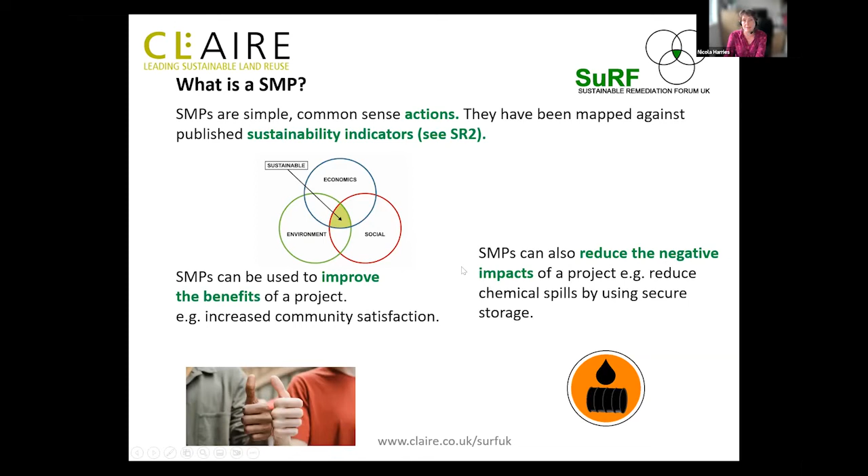So when I talked about SR1 and SR2, these are the indicators. The indicators are split in between environmental, social, and economic. It's the same number of indicators, 5 within each. So it means it's very balanced. And that's the whole principle of sustainability. It's a balance between environmental, social, and economic.

So environmental 1, it's got a title of air. So what we're talking about is potential benefits. When we're talking about the indicators, how to reduce emissions to air. So environmental 2 is the impacts on soil and ground conditions. And this is minimizing emissions to soil and improving soil functions. You'll see these are sort of just example benefits. I'm not going to go through all of them because I haven't got time, but it's really important to show that all of these indicators have got activities against each one of them. So I would actively encourage you to look at the SR2 report.

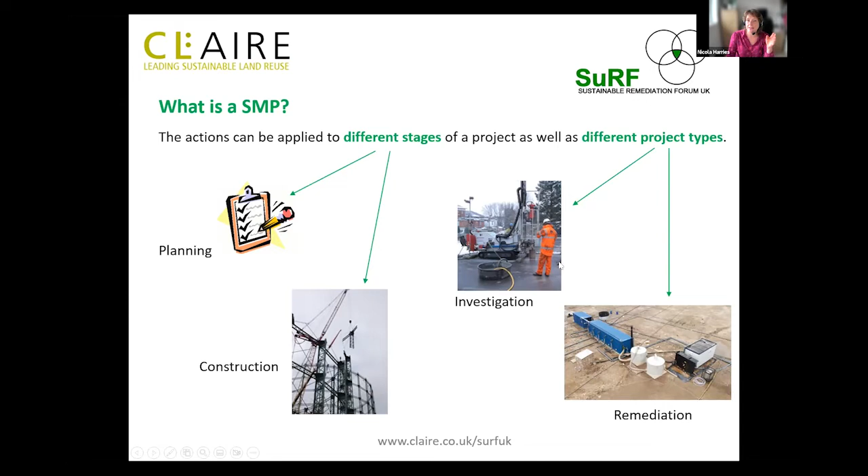So an SMP, it's an action that can be applied to different stages of a project, as well as a different project type. When we talk about different stages, as I mentioned, SuRF UK looks at things in a holistic way. So it's talking about when you're actually planning. So it could be at the planning stage, or it could actually be at the construction stage. Or when you're talking about different types of projects, you could be carrying out a site investigation, you could be carrying out a desk study, you could be carrying out a remediation. So SMPs have been mapped against different stages as well as different types of projects.

And this is just another example of how you can show how you're implementing SMPs across all the different activities of a construction project. And the really important thing about SMPs is you can have them at very high level. It could be at corporate level.

So for example, you may have a client who says, I am setting sustainability criteria for all my supply chain. And this could be carbon counting. It could be identifying economic benefits for the local community, different levels for corporate. So you could be mapping your sustainability practices against corporate level that have been set for you as a company, or you work for a corporate company and you are setting those for your supply chain.

Or you could do your sustainable management practices on a number of sites, a portfolio of sites, so you can map them against all your sites. Or it could be on an individual project. So what I'm just trying to say is sustainable management practices can be used at all sorts of different levels, whether they're individual projects or whether they are corporate company level.

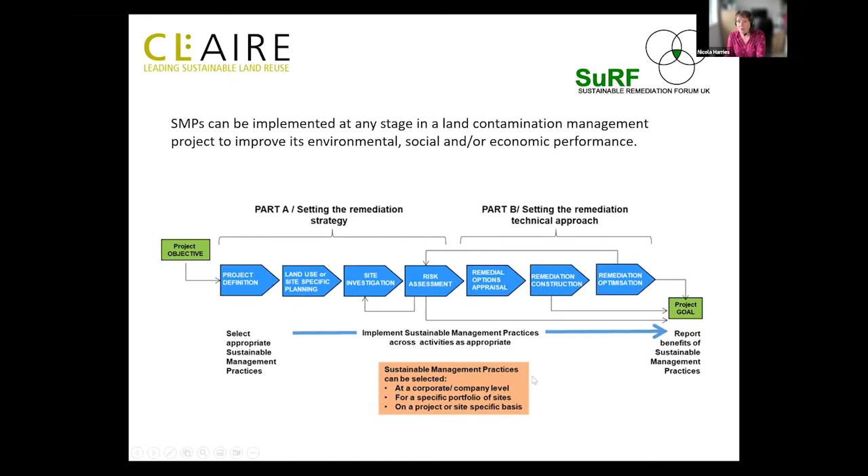So the heavens have absolutely opened here. I'm having to raise my voice because it's teeming.

Just to give you some examples, just to put it into context. So a sustainable management practice might be minimizing vehicle miles. Now you think, oh, that's really sensible because that cuts down carbon, but it's actually mapping these against the indicators. So the impact, environmental 1, is air. So that means you're reducing the impact on air. Environmental 5 is natural resources and waste. So you're reducing the use of natural resources.

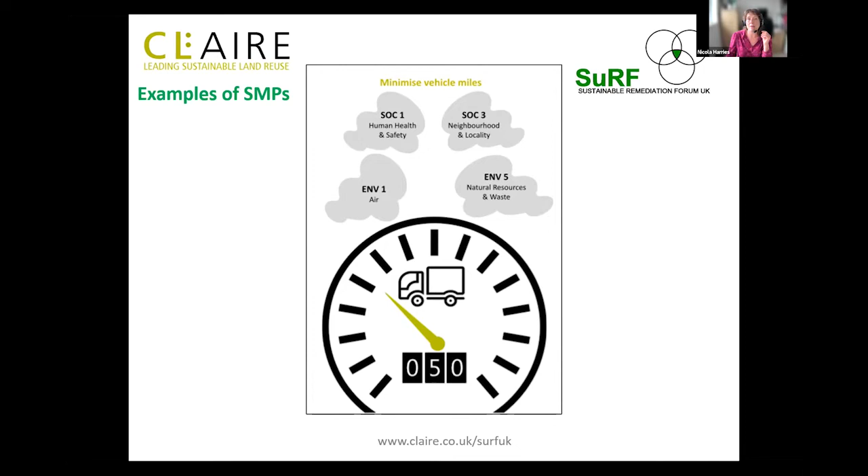Again, social 1 is about human health and safety. So the less miles you do, the less chance of accidents for your local community or for your staff, and the impact on the social for your neighborhood as well. So what we're trying to say is each simple process or practice you can map against your sustainability criteria. Give you some other quick examples.

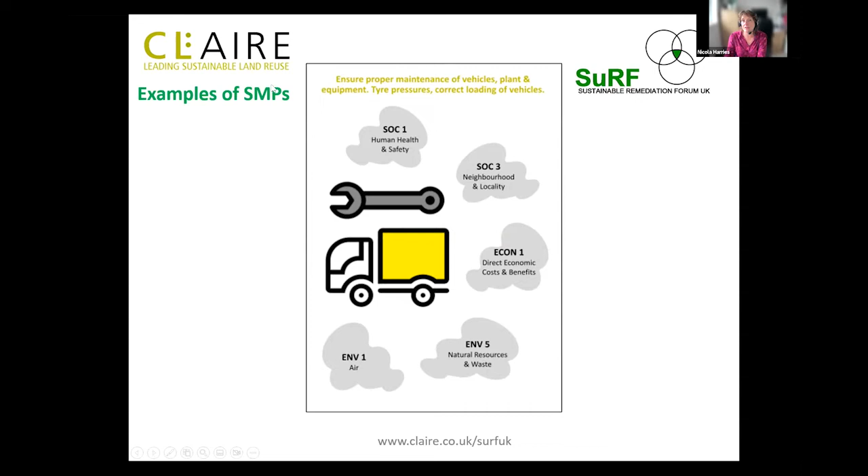A sustainable management practice titled ensure proper maintenance of vehicles, plant and equipment, i.e. you maintain your tire pressures, correct loading of vehicles. This means you can map it against environmental 1, environmental 5. You're not quantifying things, you're just identifying the different sustainability criteria that would improve if you carried out this action and you mapped it against that action.

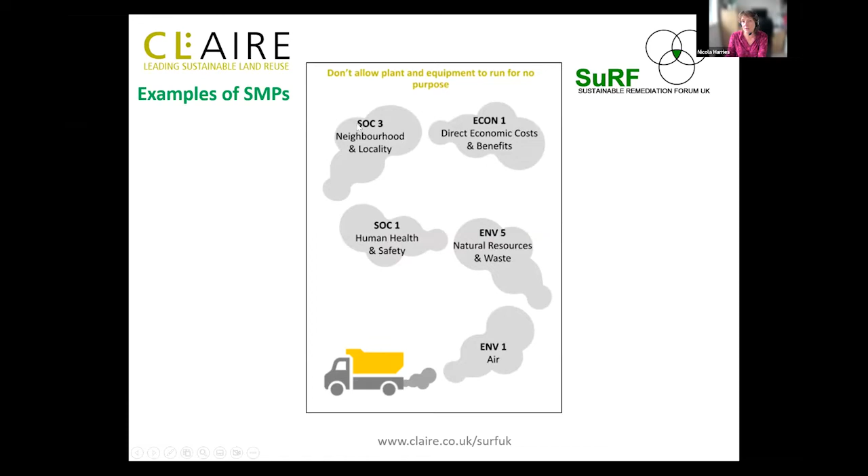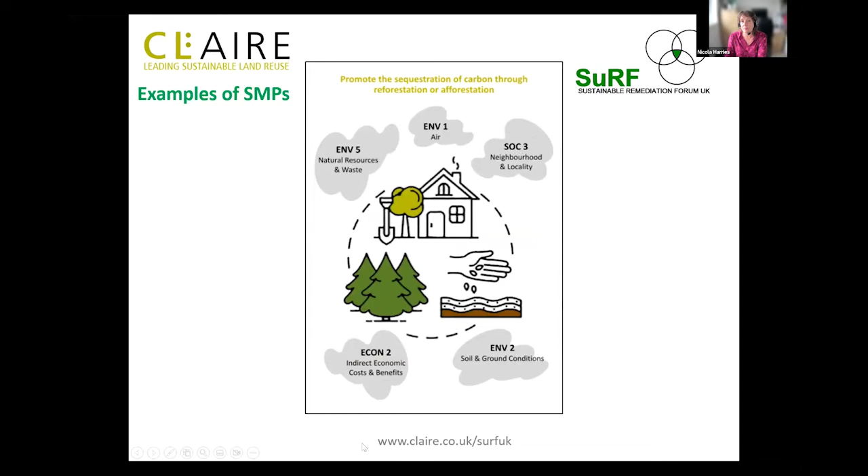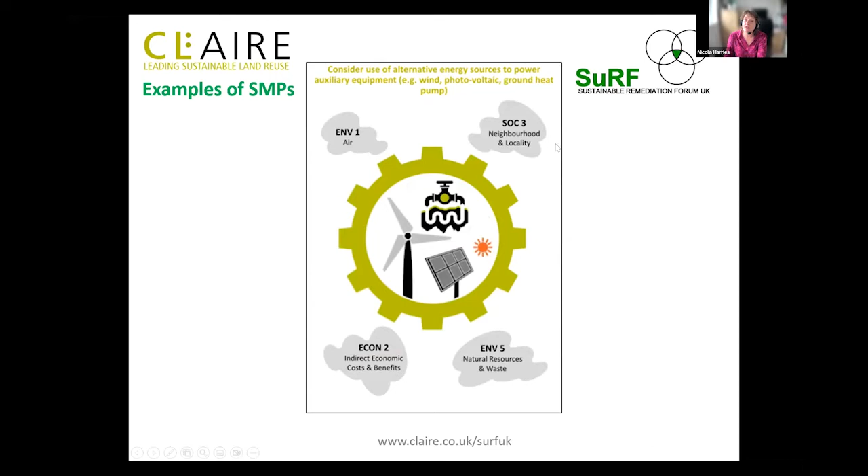Again, you make it a company policy to not allow plant and equipment to run for no purpose. Again, it has benefits on environmental 1, 5, social 1, social 3, economic 1. Again, if your project requires reforestation, this would then have these benefits against the different indicators. Again, if you used alternative energy sources, photovoltaic systems if you were doing a remediation project, or looked at ground source heat pumps, or used a wind turbine for a long-term remediation project. So these are the indicators you could benefit from.

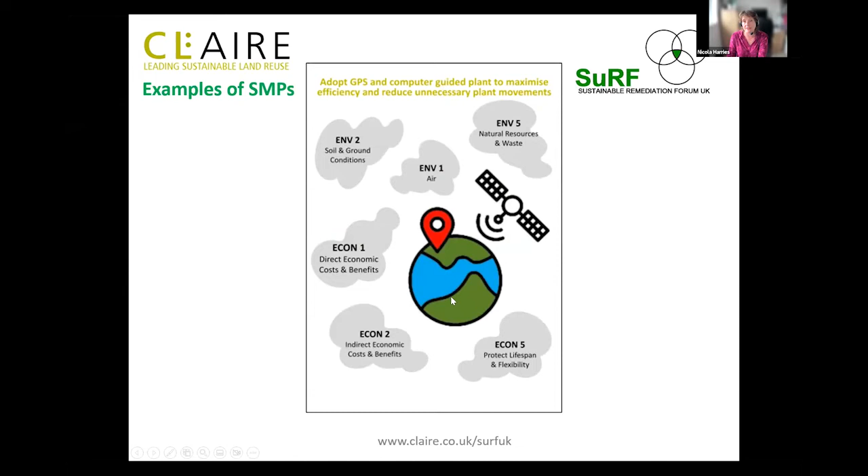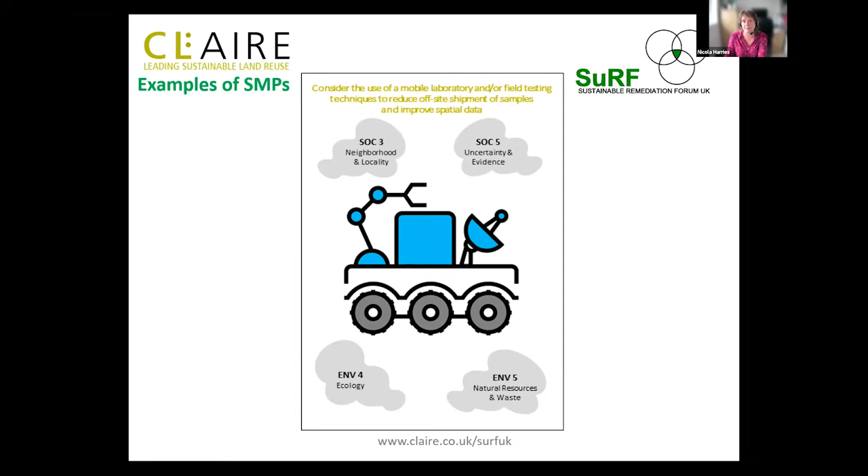Again, if you use GPS equipment on your site, that would cut down the amount of material you had to cut and fill, for example, if you were on a big construction site. These are the different indicators that we've mapped against that activity. Again, if you used a mobile laboratory or field testing techniques, so you reduced taking samples off-site into a laboratory, that would improve these indicators. So they are simple processes that you would do, but you're actually mapping them against sustainable management practices.

What we've done is we've actually mapped them against LCRM, the land contamination risk management process. So we've got the stages of procurement and land use planning. And then under the LCRM, we've identified processes under risk assessment, options appraisal, remediation and verification. And so this helps you again. It cuts out the thought process for you. You can actually search the spreadsheet. So just going through the process very quickly.

Initially, you identify your activity. What are you actually going to be planning to do or carry out on a site or as part of your project? These are the different stages we've identified. Then you would look to identify your sustainability objectives. What are the objectives that are associated with the project? So depending on the activity, you would then develop a short list of what would be important to the project.

As I mentioned, you may have a client that is setting targets for CO2 emissions or reducing the use of natural resources or waste minimization. Some clients have health and safety criteria that you must meet. The sustainability objectives must be associated with regulatory compliance, and you can address your stakeholder concerns as well. So it's identifying those key objectives.

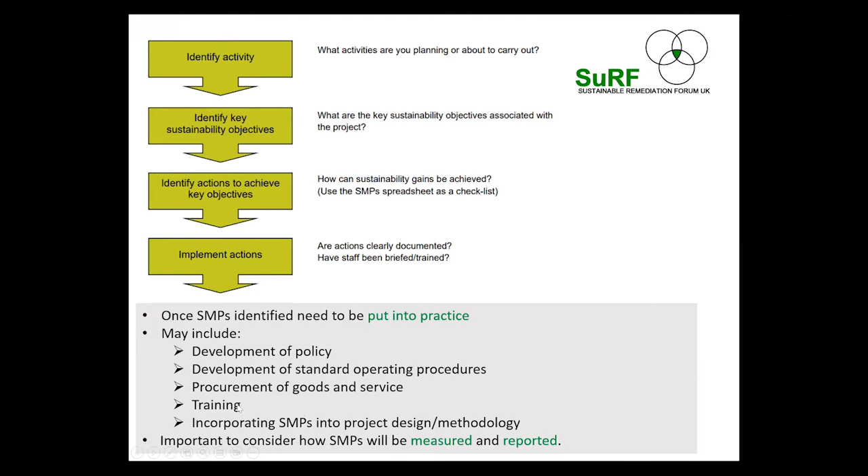So you may be developing an internal policy. You may develop some standard operating procedures to adapt your activity just so you start recording things. You could be changing your procurement process to start recording things. If you're a client, again, you may identify your goods and services from consultants and contractors, and you want to actually start building that in. Again, your subcontractors. You then develop some internal training, and then you start incorporating your SMPs into your project design and methodology, and you start recording these and measuring them and reporting them.

Once you have done all of that, then you can carry out a post-project performance review and see whether things worked or didn't, or how you could adapt your processes and procedures to get better processes and some better operating procedures at the end of it. And ultimately, you will probably identify that you actually made some cost savings, and you can see whether it's worth it or not. So that's the process. This is the process that you would go through using the spreadsheet that I will just quickly demonstrate.

So the spreadsheet is just a template, an Excel template for you to use. It allows you to identify, record and evaluate sustainable management practices, whether it's a project or a portfolio of projects. We've gone through and identified 182 SMPs for you to choose from. Now you can use some of them, you could use half of them, you could use 10 of them, whichever ones you think are applicable to your project, and you can add to them as well. It's an Excel spreadsheet, it's open, so you can change it, adapt it, refine it to whatever is suitable for you. And obviously it's free to download.

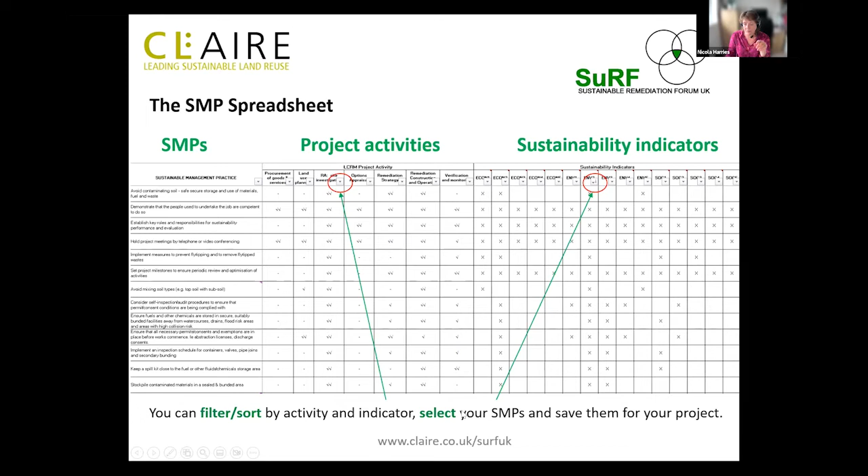And then at the end of the spreadsheet, you can also say why you've chosen those ones, you can make a comment of what's your justification, and then you can say whether you've implemented it, yes or no, and then you can carry out a performance review after your project. So, for example, avoid mixing soils and waste. What is the benefit of that? What's the justification? Did you do it? Yes. And what was the outcome? What was the evidence? And the point is you're actually evidencing your activities, and that's your sustainability gains.

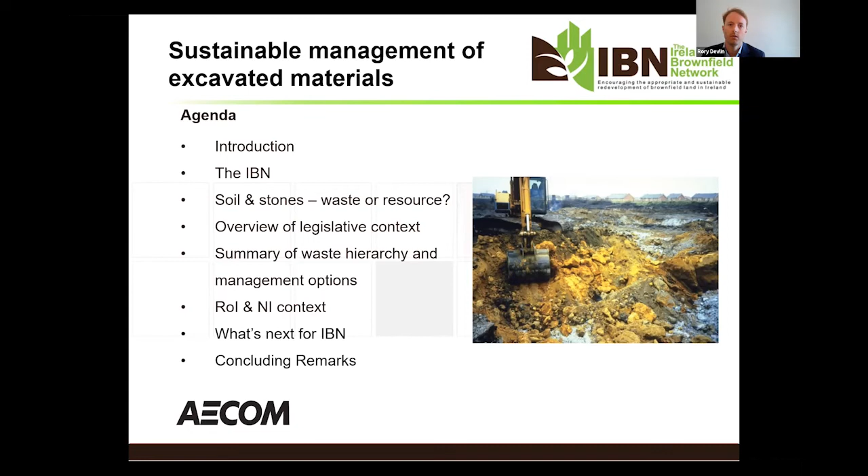So yeah, just an introduction to myself. As Ethny mentioned, I'm a principal environmental scientist with AECOM, and I've got 10 years experience of brownfield redevelopment and excavated soils management. And I've been doing a lot of waste classification work in this area. So hopefully I'll be able to impart some of my learnings over the last number of years to you today.

So the Ireland Brownfield Network was established in 2012 by a group of environmental professionals in Northern Ireland and the Republic of Ireland. So it's people from various backgrounds, including consulting firms, regulators, contractors, and academics. We have several technical subcommittees which cover different topics like ground gas, soil reuse and waste management, early careers, and emerging contaminants. We're now at over 500 members, and we have hosted technical conferences in Dublin, Belfast, and Cork over the years. As a group, we've consulted on several industry and policy documents, including draft guidance for Articles 27 and 28 and guidance on soil recovery sites in the Republic of Ireland.

And we've also drafted and issued guidance documents regarding the management of asbestos in soils and demonstrating competency in land contamination management. So our collective aim is to promote best practice in appropriate assessment and sustainable reuse of brownfield land, and to encourage constructive dialogue and interaction with everyone that's involved in redevelopment of brownfield land on the challenges and issues that we deal with across the island of Ireland. And that includes the topic for today's talk, management of soil from development sites. It's often a fairly hot topic in terms of the development industry. Many of the issues are common to both jurisdictions, but some are unique challenges faced by regulators, operators, and practitioners in each jurisdiction on the island, and they're dealt with in slightly different ways.

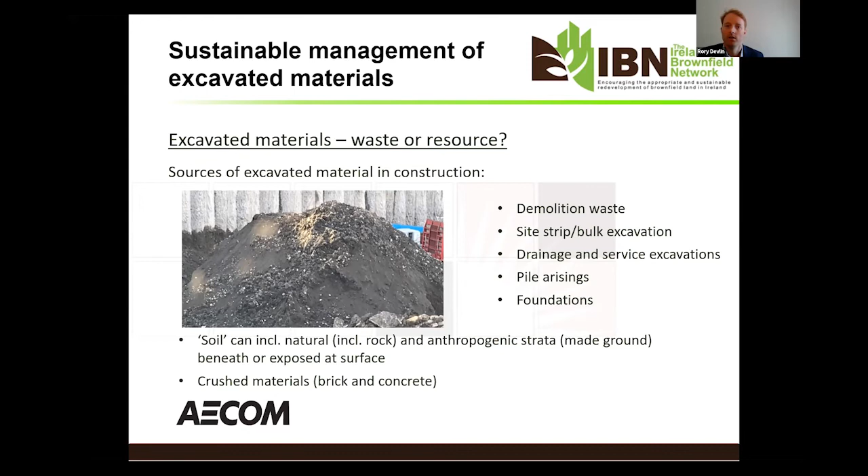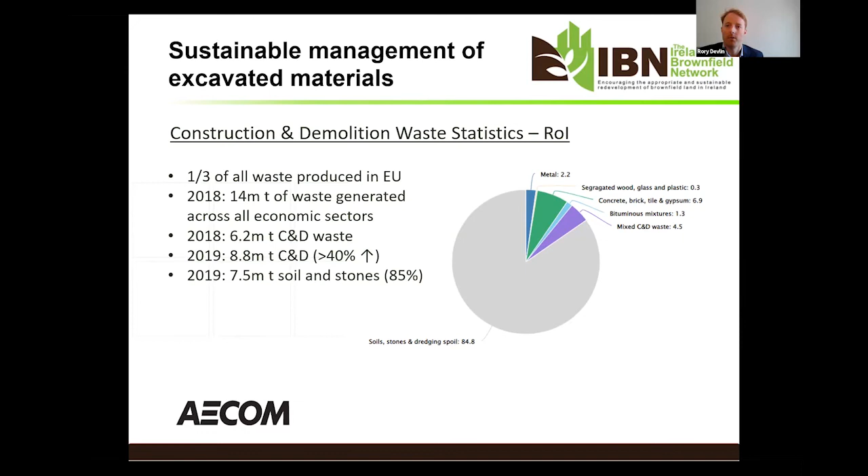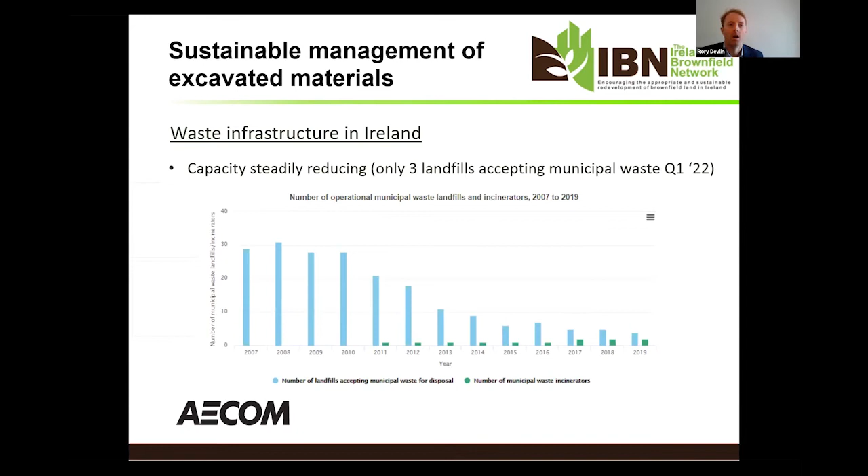To the point now where in the Republic of Ireland, there's only 3 landfills that are actually accepting municipal waste as of Q1 2022. So there's big pressure on waste infrastructure in terms of capacity. And that brings us back to the question of whether excavated material is a waste or a resource.

And for myriad reasons, it's imperative that we move towards a more sustainable or circular economy approach of preserving resources, whether that's primary aggregates being replaced with reused excavated materials, preventing precious landfill void space from being used up by diverting waste from landfill, prevention of carbon emissions from waste transportation, or any other ways that we can be more sustainable in managing excavated materials.

The governments in Ireland, in Northern Ireland and in Great Britain are all working to produce circular economy strategies and environment strategies that are more fit for purpose in terms of the new thought process. The Government of Ireland, for example, in their circular economy strategy for 22-23, noted that within the construction sector we need greater resource efficiency and resource reuse

to avoid the need for millions of tons of virgin raw materials to be produced, and also to reduce the carbon intensity of our built environment. As a byproduct of this, reducing the volume and associated costs of construction and demolition waste could also contribute greatly to affordability of development, for example, of new homes, given the current housing crisis.

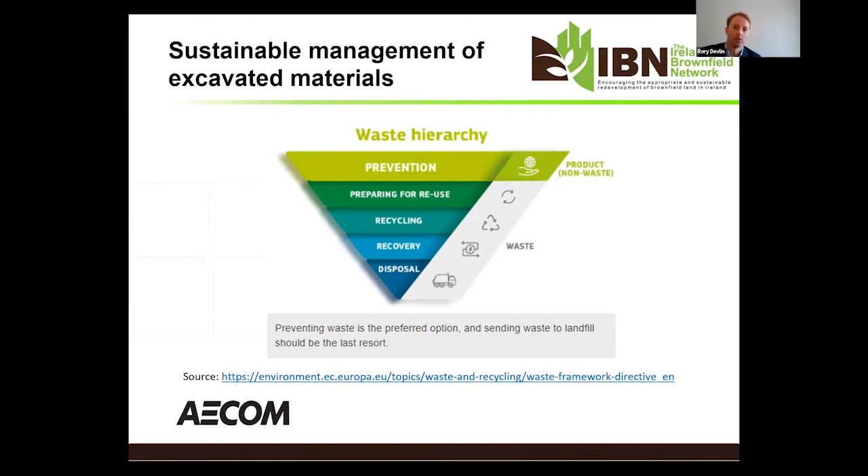And it includes a number of exclusions. The first one that's of interest to development sites is that land which remains in situ, including unexcavated contaminated soil, is excluded from the scope of the Waste Framework Directive, as are uncontaminated soils and other naturally occurring materials which are excavated in the course of construction activities and which are reused on the same site from which they are excavated.

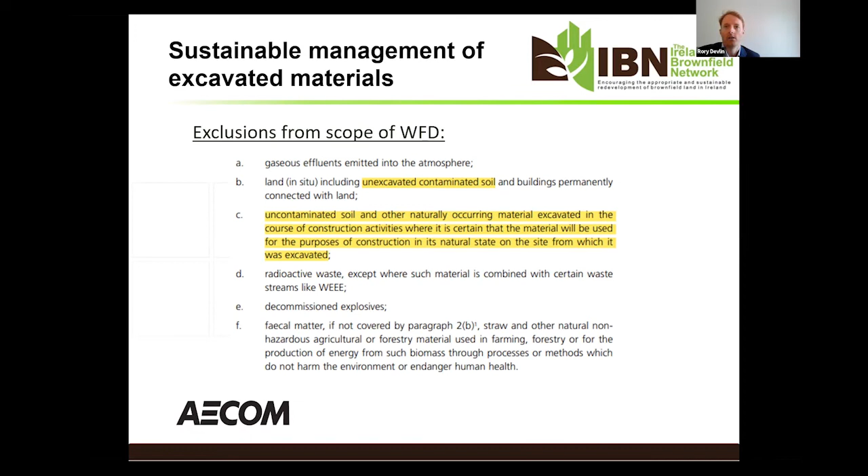There's a number of other items excluded from the Waste Framework Directive as well, such as wastewaters and animal byproducts. They're not of relevance here, but potentially of relevance are wastes resulting from prospecting, extraction, treatment, and storage of mineral resources in the working of quarries. In addition to those exclusions, the Directive also includes provisions for byproduct and end of waste. A byproduct is a substance or object resulting from a production process, the primary aim of which is not the production of that item.

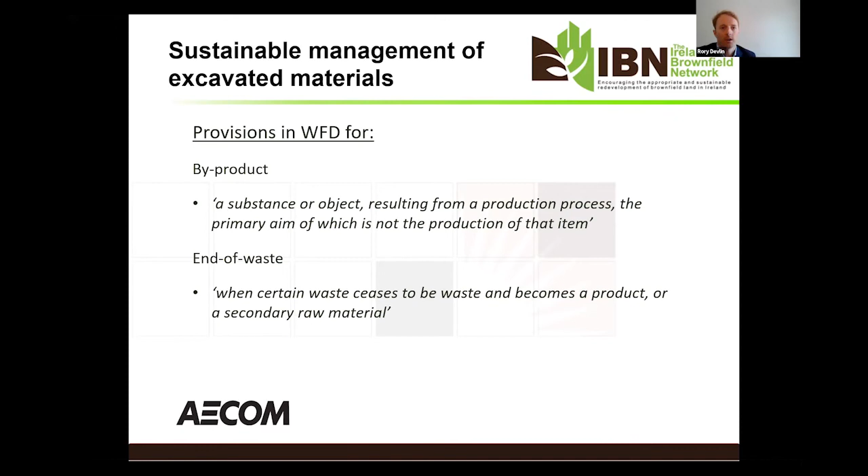In terms of development sites, your byproduct will be the soil or stones produced as a result of the excavation for a basement or foundations. So the process is the digging out of your basement, and the byproduct is the soil and stone that arises from that excavation. Similarly, end of waste is when waste ceases to be a waste and becomes a product or a secondary raw material. The one you're probably most familiar with is the production of secondary aggregates from the crushing of construction and demolition waste.

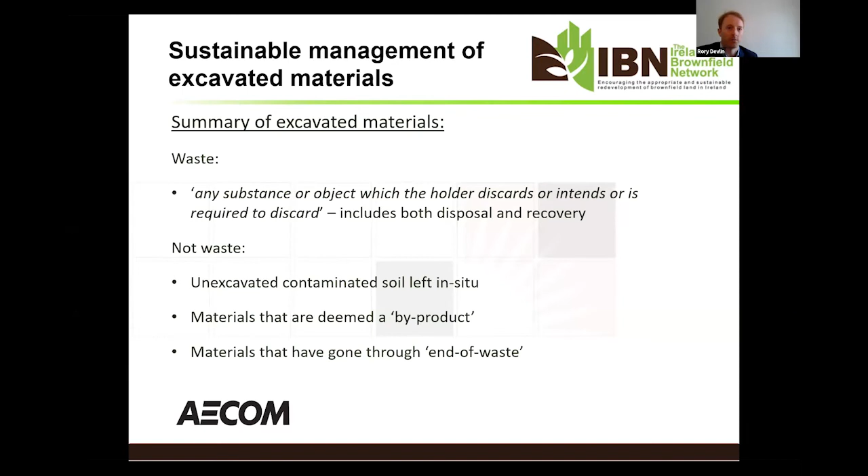So in summary, waste, like I said, is any substance or object which the holder discards or intends to or is required to discard. And that includes both disposal and recovery actions. I'll touch on those a bit more shortly. And then not waste will be any unexcavated contaminated soil that's left in situ. I should also have included there excavated soils that can be reused on the same site they were excavated from, materials that are deemed a byproduct, and materials that have gone through the end of waste process.

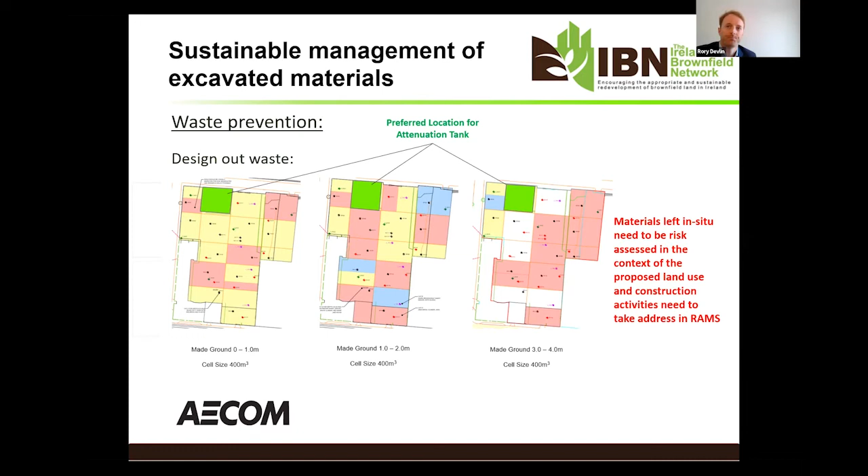And it's important to note that neither the Waste Framework Directive nor Northern Irish or Republic of Ireland legislation or guidance define the terms contaminated or uncontaminated. So it's a little bit of a grey area and somewhat open to interpretation. The European Commission has produced guidance which states that uncontaminated soil essentially relates to virgin soil or soil that is equivalent to virgin soil.

But in the UK, the CL:AIRE Development Industry Definition of Waste Code of Practice takes a more broad approach and says that soil that may not be considered contaminated for a given land use may, for a different and more sensitive land use, even on the same site, be considered contaminated. So it basically comes down to assessing risks to human health and controlled waters from the material in the context of the proposed reuse. And that's important to consider and to take account of.

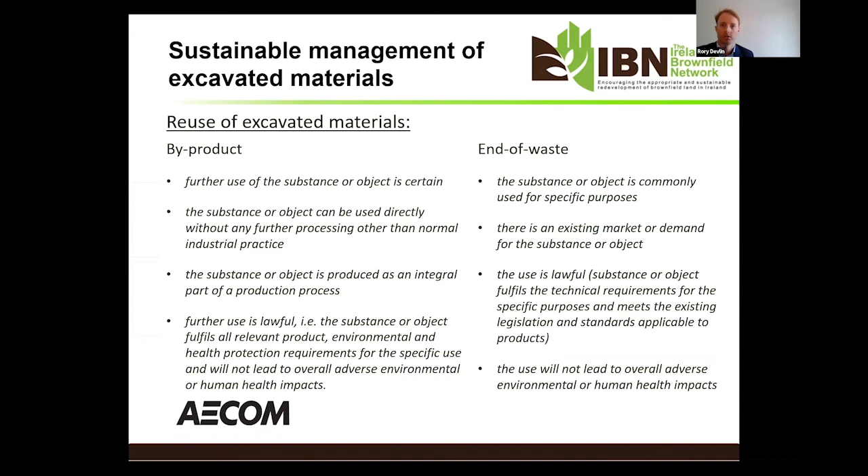And the other criteria are basically around certainty of use, that you have a defined end use for the material, and that you're not just reusing it in some creation of a berm or some landscaping or something like this, which isn't part of the design of the site, and which would effectively be landfilling. So what it's trying to ensure is that there's a specific and genuine beneficial reuse for the material, and that it's not just being used to avoid paying landfill charges to dispose of the material.

The final options then, and again these are the lowest in the waste hierarchy, are recovery and disposal of excavated materials. So recovery and disposal are both waste activities which occur at licensed or permitted sites, but which differ in the types of waste they can accept and the way that the waste is dealt with. Waste classification, I'm not going to go into it in detail, but suffice to say that all waste for recovery or disposal have to be appropriately characterized, including waste classification to determine if they're hazardous or non-hazardous, and then if necessary, assessment against relevant waste acceptance criteria appropriate to the proposed facility.

Recovery facilities are often worked out quarries which are being restored by backfilling, or sites where soil and stone is imported to raise natural ground levels. So they don't tend to have environmental controls, so they tend to be only able to accept relatively clean and benign materials. Whereas disposal facilities are generally engineered landfills which have appropriate engineering controls to protect underlying soil and groundwater from contamination. And the level of control will depend on the type of waste for disposal. So obviously a landfill for inert soils is going to need a lot less protective measures than a landfill that was going to accept hazardous waste.

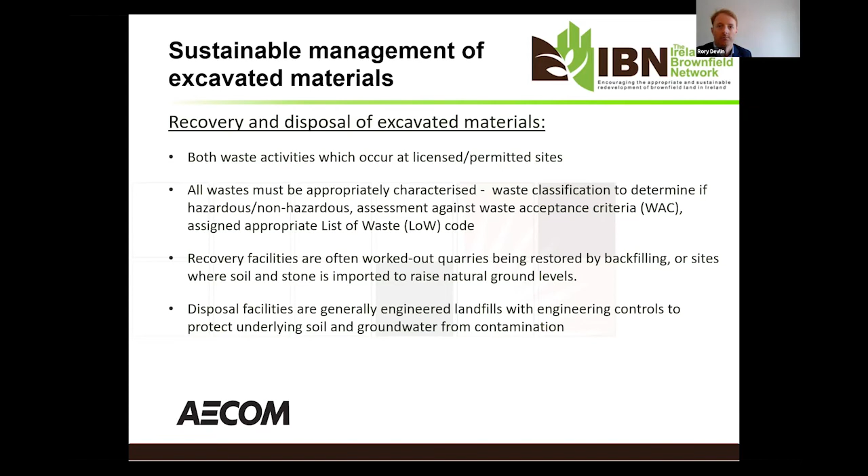So then, in terms of the Irish context, the basic principles I've gone through in the previous slide are the same across Ireland and Great Britain, and both jurisdictions in Ireland, but they're adopted and regulated differently in each jurisdiction. It's got a little better in the south over the last number of years in terms of becoming a bit more structured. So waste prevention is typically done at the design and planning stage, like I mentioned, through the contaminated land risk assessment regime. And typically there's little to no regulatory input in this stage. It's done by the client and their consultants to try and find the best design, most economic design, most sustainable design, and management options in terms of the proposed development and what fits.

In terms of on-site reuse, again done through contaminated land risk assessment. This is generally achieved through planning, so often via a methodology for beneficial on-site reuse of material, which is detailed in a construction environmental management plan. And development of a CEMP is typically a planning condition, but it won't always consider beneficial reuse unless that's part of the proposed development.

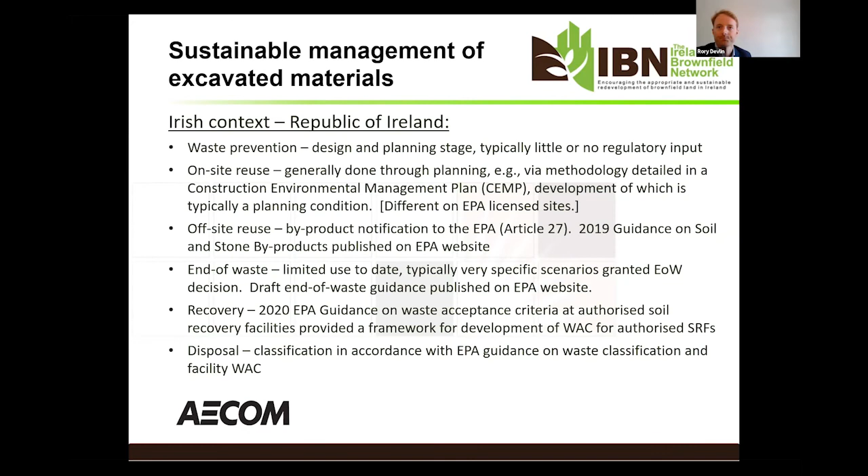In terms of Northern Ireland then, it's a different and slightly less structured situation. So waste prevention is again dealt with at the design and planning stage under the contaminated land assessment regime, so similar to Ireland and Great Britain. And waste disposal is also similarly undertaken in accordance with the Northern Irish version of the Environment Agency's WM3 guidance on classification and assessment of waste, and through assessment of waste acceptance criteria.

But apart from that, other management options are dealt with through a mixture of declarations, exemptions, and regulatory position statements from the NIEA. And it can be a little bit vague at times. So there's a number of these different declarations, exemptions, and RPS, such as land treatment for agricultural benefit or ecological improvement, guidance on reuse of greenfield excavated materials in construction, testing regimes for receiving soils and wastes under exemption.

So any excavated material that's not under a greenfield declaration, leaving the red line planning boundary of site, is considered to be a waste, with a few limited exemptions. So paragraph 11 for reclamation and remediation, paragraph 19 for construction and maintenance. And it must be dealt with under duty of care and all the obligations to go along with that, including registered waste carrier, appropriate consignment notes, transfer notes, etc.